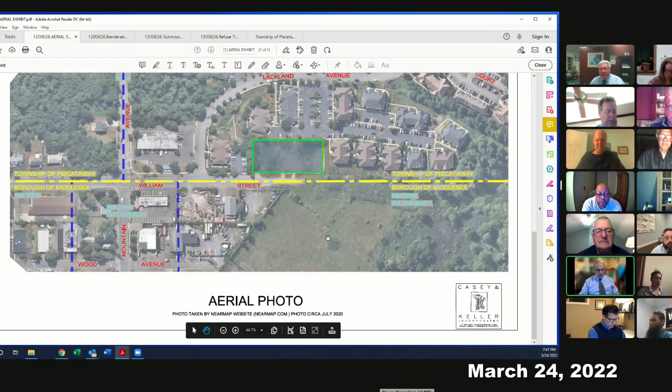And what I'm going to begin with is an aerial image prepared by our office. It's an aerial photo taken through the Nearmap software that we have available. This is an aerial image from July of 2020. This exhibit was utilized during our use variance application that we had gotten approved, that Mr. Arch had referred to earlier. But for this application, we should mark it as A1, Mr. Chairman, with today's date, please. A1 with the aerial photo, July 2020.

So what A1 depicts is the subject property, which is 616 William Street. It fronts on William Street, approximately 475 feet west of Mountain Avenue. The property is located in the R10A zone. It's a 33,616 square foot parcel, which equates to 0.77 acres in size. It has frontage of 275.5 feet along William Street and has a depth of 122 feet. The boundary line with the borough of Middlesex runs right down the center of William Street, and the property is surrounded by the multifamily housing development known as Maple Grove. To the south, in Middlesex Borough, is more industrial uses in the IND district.

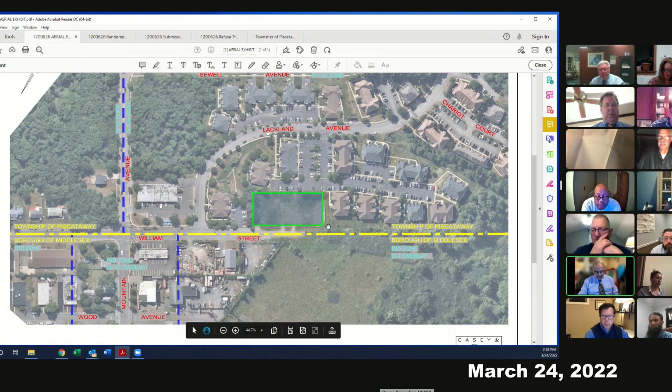The second exhibit I'd like to utilize is a rendered exhibit. It is the landscape plan that was submitted as part of the application, but it allows us to lay out for you the proposal and what we are planning to do with regard to the development of the property and the details regarding the variance we had received. So that will be A2? This would be A2, rendered landscape plan, sheet number 7 in the plan set.

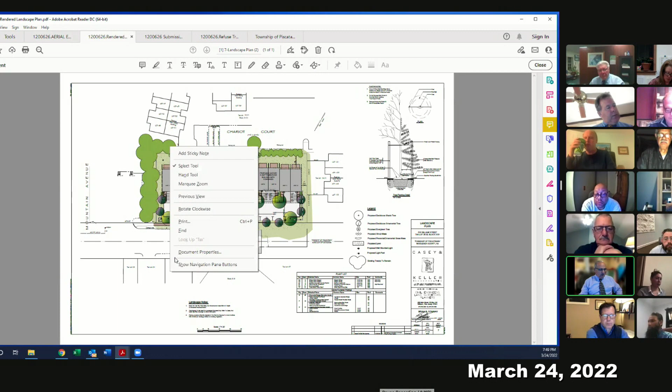And what this depicts is the development of 12 townhouses clustered in 2 6-unit buildings. The buildings would each have a 1-car garage. Driveways would be available in front of each of the units, so there would be access to a 1-car garage, as well as the ability to park a vehicle directly in front of the garage doors. This would be typical in each of the units. The development would also provide visitor parking parallel to the front of the units. There would be 6 parallel parking spaces located along the William Street frontage. We will have a single entry driveway to the site.

The use variances were granted. In addition to the use variance, density and building coverage variances were also granted. The metrics of the site: the front yard requirement is 35 feet, the buildings will be set back 55 feet. The side yard minimum requirement is 10 feet, the buildings would be set back 10.5 feet. The rear yard setback would be compliant at 25 feet, which is what's required under the ordinance.

The building coverage would be 9,600 square feet, or 28.6%, and the density would be 15.5 units per acre. This is all consistent with the variance that we had received. The building heights would be 35 feet. And as I stated earlier, the parking would be provided: one garage space, one driveway space, as well as parallel parking spaces, which would give us 24 parking spaces for the units themselves, as well as the 6 visitor spots, bringing us to a total of 30 provided, where 24 are required under the residential site improvement standards.

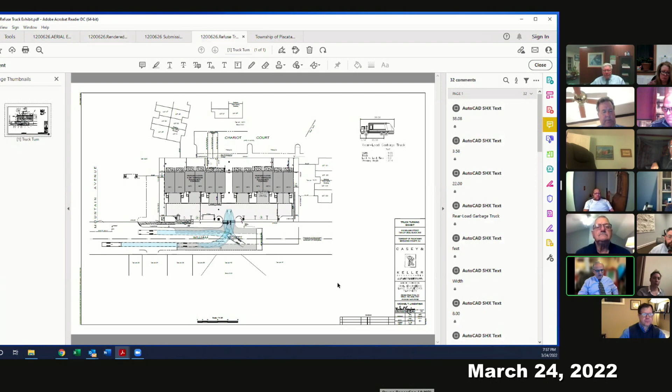One of the questions that came up in one of the memos, this I assume we would mark as A3. Yes, sir. This is a truck turning exhibit prepared by my office to show how a garbage truck might enter and exit the site. What we had envisioned is that the refuse would be brought out that would normally be stored in the garage units.

I'm sorry, I'm just going to have to take a break for a minute. Take your time.

Refuse would be brought out to the curb line. The truck could pull in, back in, and they could then easily walk the refuse to the back of the truck. He can then exit the site. So there are several different ways he can get in and out of the site, so it should be no problem for the refuse truck to maneuver within the site.

As far as the landscaping itself, we are proposing cherry trees to kind of frame the front parking area. There'll be honey locust shade trees and ginkgos at the corner of the property.

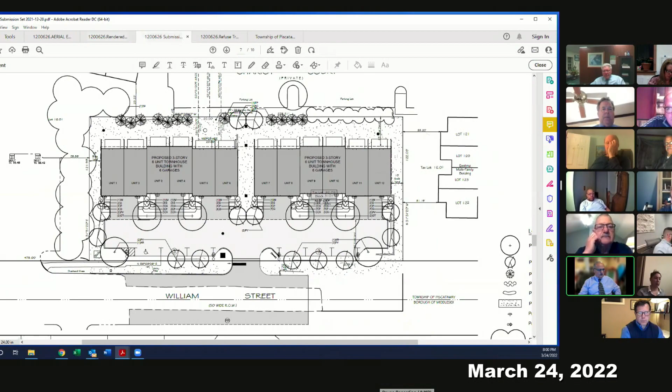So the only variance we seek is that for the sign. Let me just go to the submission set. This is what we're talking about, something very tasteful. William Street Townhomes—you're not talking about an extremely large sign.

We felt that the site should have some identification, and site identification is important for life safety issues, for firefighting, police, ambulance to come to a property. So we think it serves a purpose. We don't think that 12 square feet is excessive. We think that under the C2 criteria, this could be granted without a substantial detriment to the public good or the intent and purpose of the zone plan.

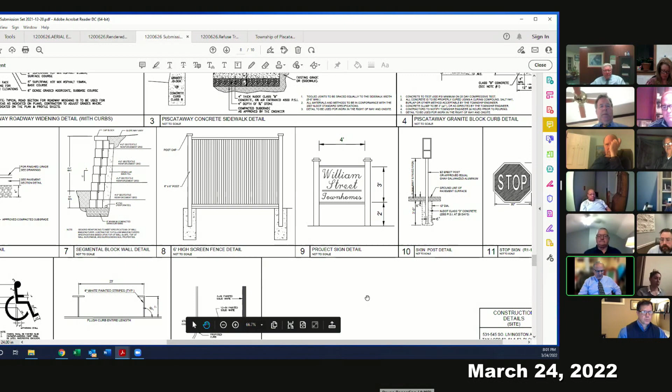We will be providing some decorative landscaping at the base as suggested by Mr. Hinterstein. That's about as far as I can go. I'll be happy to answer any questions.

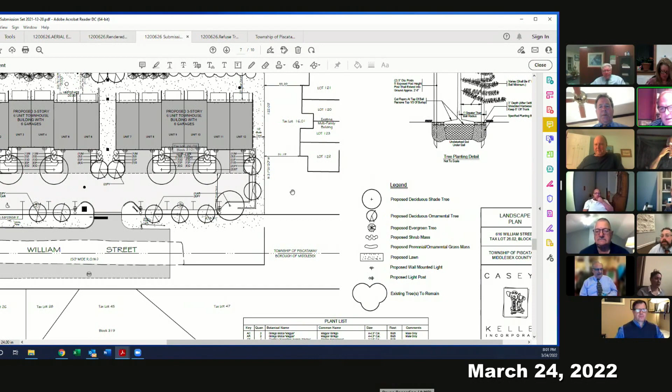Thank you, Mr. Lanzafama. You're welcome. Any questions from any members of the board?

I was wondering if there was going to be any electric car spaces. I don't believe there's going to be any in the public parking area, but I believe the units themselves could be equipped in the future—they could be made electric ready. I know a number of projects where we've done that, but that's a possibility. I'd have to defer and ask my client.

But you do understand you'd have to comply with New Jersey's new statute requiring certain developments to install electric charging stations. Yeah, up to 15%, spread out over a period of time. So the units could be made ready as needed—electric ready technically—just a matter of putting in the charging unit.

If I may just add, certainly it's a state statute. This board doesn't have any jurisdiction to grant relief as to that. So we have to comply with that New Jersey state ordinance as to EV spaces, and we certainly agree to comply with that.

Okay, any other members of the board have any questions? Yeah, Steve Weissman. Go ahead, Steve. I'm looking at this—you had a picture of a garbage truck backing into it.

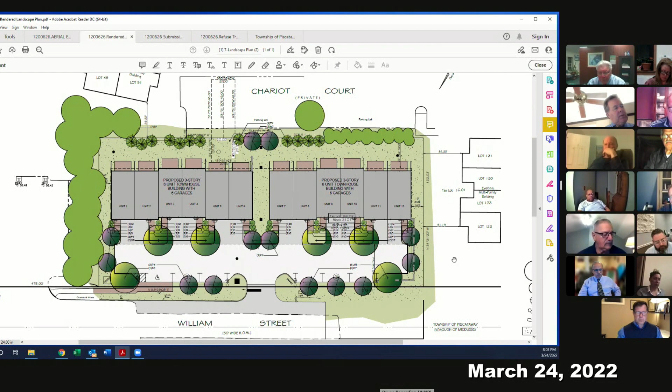I'm one of the firefighters in town. I'm wondering if we could get a fire apparatus to make the full turn to get to either end of the court. I don't believe you could. We didn't think you would want to come up into this area to engage one of these units—we figured you would probably just want to pull up and gain access directly from the street.

And again, for the record, I will add, Mr. Lanzafama, we did get approval from Mr. Gore, the fire marshal, on this proposal. Okay, I saw that Mr. Gore was part of the process—I didn't know it happened already. Thank you. You're welcome.

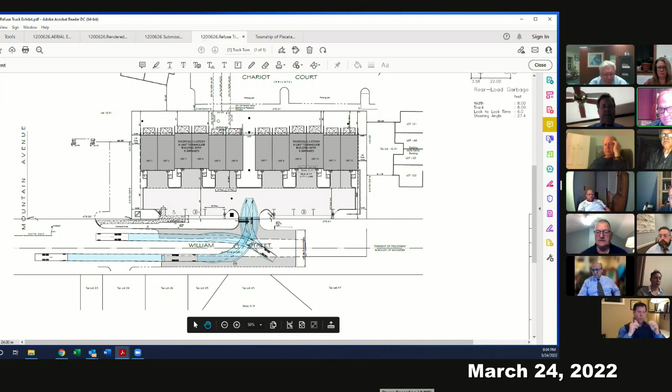Thank you, Mr. Weissman. Anyone else on the board have any questions? Hearing none, Mr. Arch, you can put on your next. Mr. Chairman, I have a couple—I don't know if they're to the engineer or not.

The affordable housing requirement—are these going to be rental or for sale? Tim, did Michael make a decision on that yet? I'm going to have to defer to Mr. Michael Murray. I believe these have to be for sale.

The use variance application required that these be townhomes, if I'm not mistaken. Well, you can rent townhomes, Henry. Well, the owner of the individual one could rent it, but I think the original application was apartments, and if I'm not mistaken, they amended it to be townhomes. Now, whether or not a homeowner who purchases it rents it out, I don't know if they could be strictly for rent versus for sale.

I'll defer that to Mr. Keneally. The reason I raised the question is that if it's a rental, the two units would conform to the township ordinance. If it's for sale, which they certainly seem to be set up that way, then there's a 0.4 unit, which means under the township ordinance you have to pay for that 0.4 unit.

So my recommendation to the board is that you treat it as ownership, that they would provide two affordable units. I believe that's the plan—all to be two bedroom, provide it as two all-affordable two bedroom, potentially three bedroom.

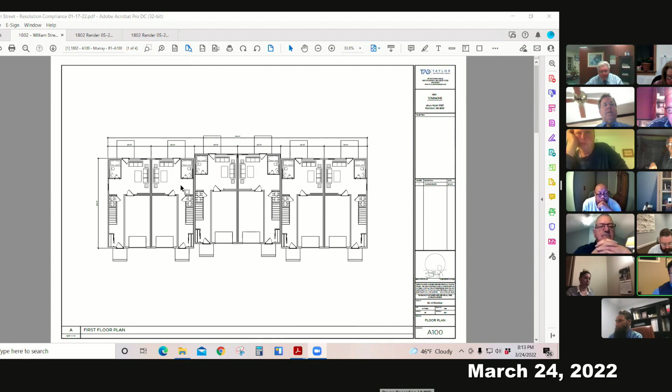Each building is 3 stories, and what you're looking at currently is the first floor plan, which consists of a garage, a recreation room, a full bathroom, and a mechanical closet. Each of the units is essentially identical, some are mirrored. Up on the second floor, we have a kitchen with an island, a dining room area, a living room area, and a powder room.

And then up on the third floor, we have 2 bedrooms, a small sitting area, another full bathroom, and a laundry area.

From the last hearing that we had, we did show some of the architecturals, and one of the comments was that they wanted the building to be a little bit more appealing in terms of materials. The building was mostly just vinyl siding, 2 different colors of vinyl siding with a very small stone base at the bottom.

So what we did is we took those comments and understood that the building wanted to look better on all sides. So we expanded the stone veneer to come up, number 1, to basically the top of the window and door heads on the first floor level, and that continues around the whole perimeter of the building. Additionally, we brought the stone veneer up sort of up these bays of each of the townhome units underneath the gable roof, so we're just introducing a little bit more masonry. I think it makes the building look a little bit more appealing.

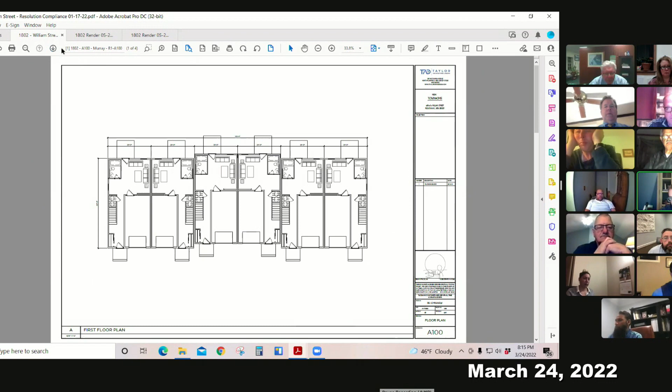Mr. Taylor, this is Henry. Just quickly, the elevations that you provided with the architectural set, they don't - I don't think they picked the type of stone I would imagine that's going to be used on the building. It looked like, you know, just sort of generic block. But I know from the previous elevations, you're going to choose and work with us on some of those stone materials. I imagine it'd be either ledge stone or some kind of veneer stone that's a little bit more decorative than just like the block simulation that's shown here, correct?

Yeah, it's just a generic hatch to indicate, and that's why I kind of colorized this. But yeah, we'll certainly work with you, and we'd also be happy to provide a revised rendering with whatever we choose to go with in terms of exterior materials. Thank you. Thank you, Henry. Any other members of the board have any questions?

I'm going to open it to the public. Anyone in the public portion have any questions for this expert and the testimony we just gave? Ms. Buckley? I don't see anyone, Chairman. Okay, I'm going to close the public portion.

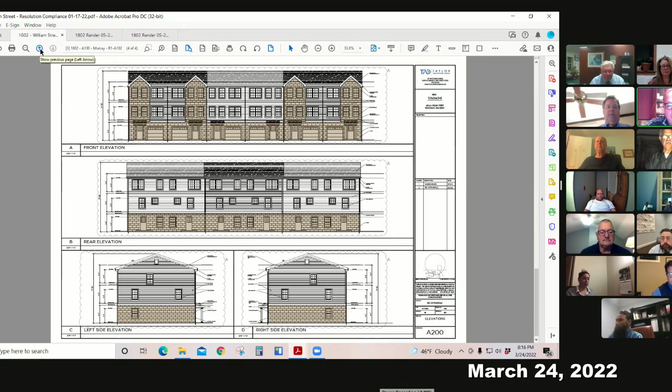Did you want a summation here, Mr. Arch? I think perhaps you should check with your professionals to see if they think there are any open issues. Fair enough. Mr. Chadwick or Henry, do you have any issues before we take this to vote?

The only comment I have is if you approve this, he has to identify the 2 affordable units. And I think we concluded that they were for sale, so the resolution would also require a monetary payment for the partial unit. If I may, if I can respond to Mr. Chadwick momentarily.

Certainly, if the prior resolution in the use variance anticipated and indicated that it was restricted to sales and not rentals, we would obviously abide by that. I just don't know that to be the case. So I would ask that we're held to whatever the previous resolution indicated in terms of that, and that we certainly will meet our affordable housing requirements, whether it's sales or rentals, per the prior resolution. Certainly the prior resolution is governing, so we will be able to work that out.

Thank you. They will also have to submit their housing plan to the township's affordable housing consultant so that gets recorded. There is, in the township's plan, a requirement for different bedroom mixes, but there's an exception for small projects, which qualifies. So they can be both 2 bedrooms, and we don't have to get into 3-bedroom issues. We will certainly agree to comply with all those requirements.